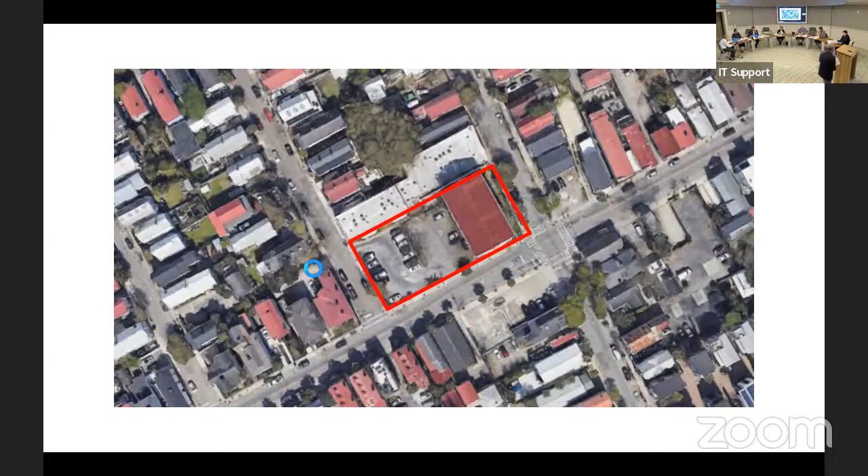Thank you. My name is Vince Graham. I live at 5 Charles Street. On behalf of my business partner, Bob Holt, who is also my neighbor, we live about 3 blocks from this project. As BD showed you the location briefly, I'll mention again, this address is a mile from the Ashley River, a mile from the Cooper River, a mile and a half from Magnolia Cemetery, and a mile and a half from White Point Garden. It's in the center of the historic peninsula. When it was a church, which it was for 100 years, St. James Methodist, the motto was 'In the heart of the city, for the hearts of the people.' And it's certainly in our heart.

I would also like to introduce my associates, my associate Ann Tyler Howell and Jalen Johnson, our structural engineer Craig Bennett, and our architect David Thompson, and his associates Lily Knox and Savannah Puckett. So with that, we're super excited. The good news is the project, we've been working through the process, and it was recently confirmed as being put on the National Register of Historic Places. So that's what's changed since the last time. But with that, I'll turn it over to Dave.

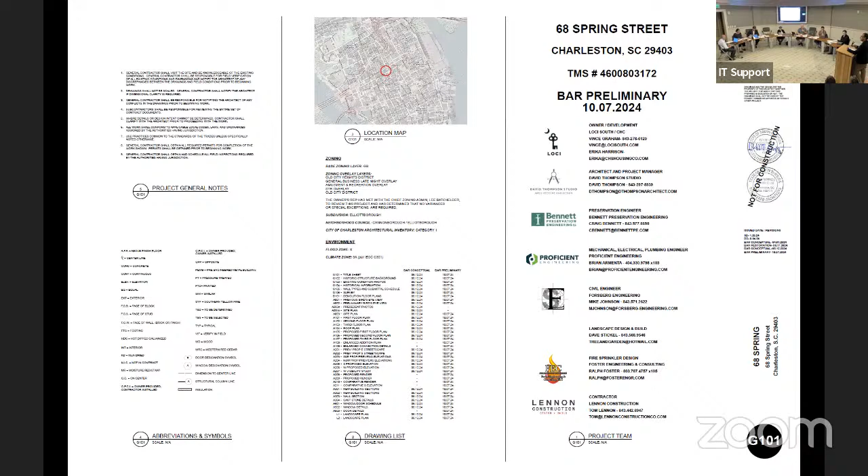As we're going through that process, our team has used the Secretary of the Interior standard for the treatment of historic properties as a guide during the design process. I'll offer a brief update for board members present tonight that were not present at the last meeting. Board comment from the April reading of the previously proposed work was to provide a more complete and detailed inventory of the scope and repair work to be performed for the historic structure. The detailed repair narrative and supporting drawings and specifications was submitted by our team in May and was reviewed and approved by staff without comment or objection.

As such, this proposal is primarily focused on the proposed addition to the west side of the existing building. On January 17th of this year, we reviewed the scope of work and proposed use for the project with Chief Building Official King Granada and Captain Rick Flugie of the Fire Department. During that meeting, it was stated that use of the existing third floor will require an accessible route and an accessible code compliant means of egress. To satisfy those requirements, an elevator must be provided, as a lift is not allowed for more than one story of travel, and a new stair must be constructed to provide a second means of egress from both the third and second floors of the existing building.

Secretary of Interior standards state that it's often necessary to make modifications to a historic building to make it compliant with accessibility code requirements. Work must be carefully planned and undertaken in a manner that results in minimal or no loss of historic exterior and interior character-defining spaces, features, or finishes. The goal should be to provide the highest level of access with the least impact to the historic building.

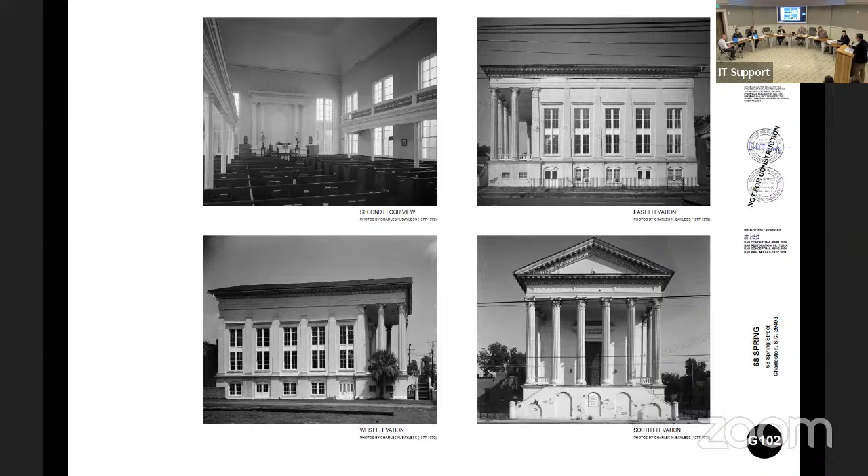I'll keep it slow with the clicker. Wait.

To address the required code compliant needs of the building, a 3-story stair and elevator addition is proposed, based on unanimous feedback from the board at the April meeting. We've reconceived the design of the addition to be a considerably smaller footprint. Just for reference again, previous in April and current now, a distinct building form, so to be a smaller footprint, a distinct building form, and be connected to the historic structure by a significant hyphen element.

To achieve the smaller footprint, all restrooms were repositioned to be inside the existing historic building rather than inside the proposed addition. This effort reduced the amount of historic fabric affected by the addition and reveals an additional bay of windows towards the public right of way on the west side.

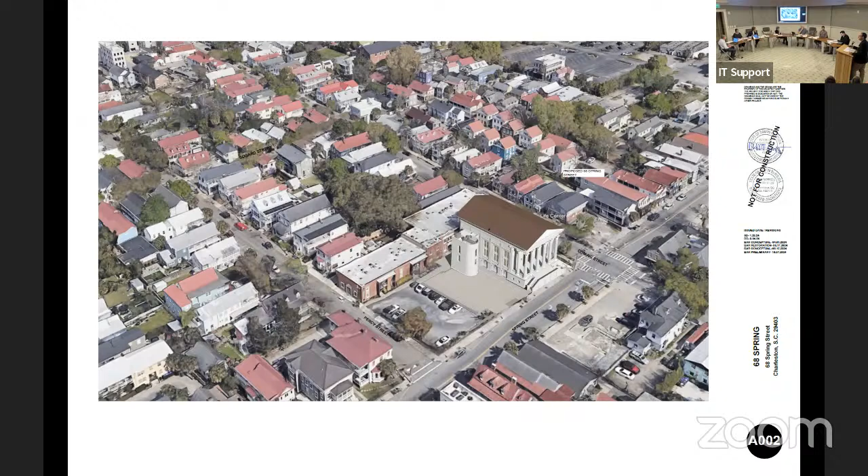We're gonna look at the plans here in a second, I promise. And if you need, Lawrence, forward sometimes. The first floor. So just to recap how we got here, and forgive me, Seton and James.

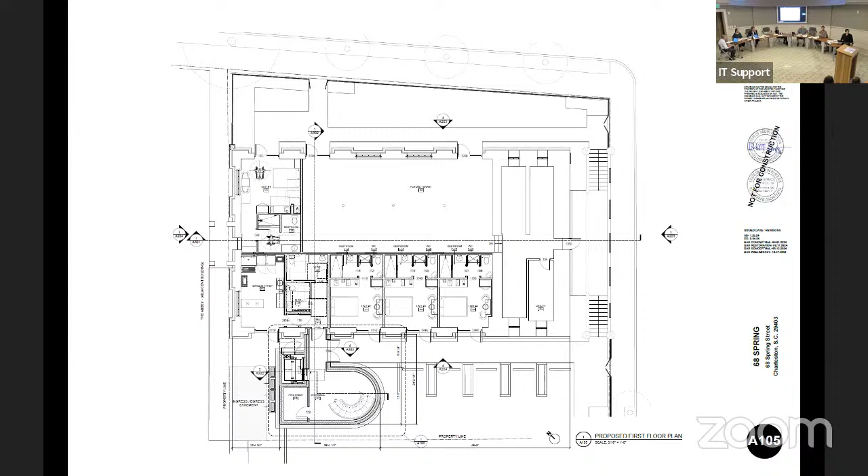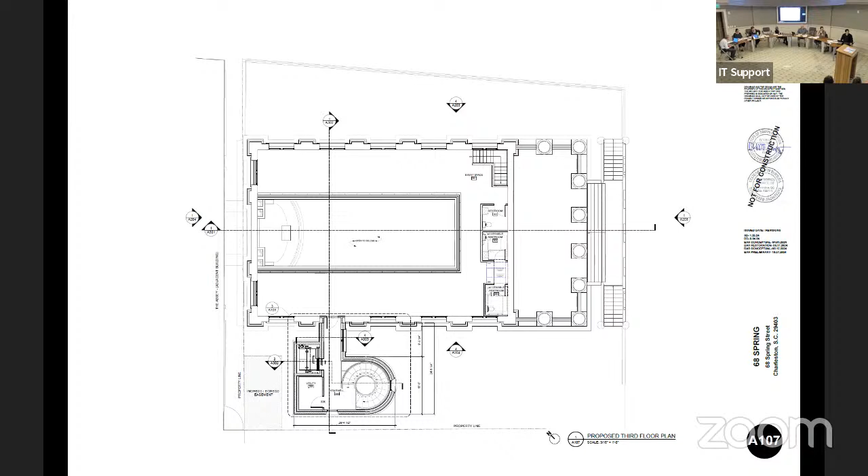So now the bathrooms have been repositioned on the first floor here; previously they were in this piece. On the second floor, this is reduced now to only having the electrical room, elevator, and stair. The remainder of the bathrooms have now been positioned on the existing third floor balcony, and we're using the existing organ facade to hide two of those.

The August board review of this project granted conceptual approval of the project, with two primary areas of concern to be addressed with this preliminary approval review.

The first area of concern was the height of the addition relative to the height of the existing building. Our team worked with the mechanical engineer to reconfigure the rooftop HVAC equipment and locate four mini split condensers at grade behind the addition, so that we could reduce the height of the stair tower parapet by 25 inches. The hyphen height has now been reduced by 32 inches. These are significant height reductions and now ensure there is no alignment of proposed new elements with historic entablature elements.

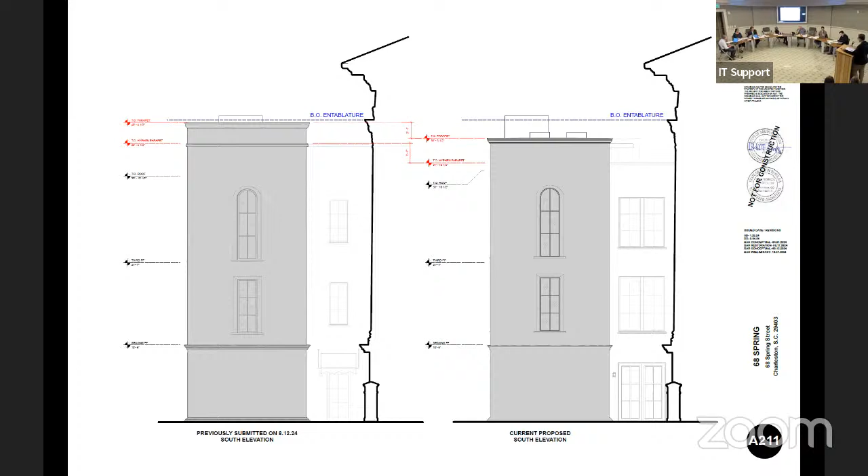To address staff comments about making the proposed addition distinct from the historic building, the frieze on the stair tower parapet has been removed, and the base, water table, and parapet detailing has been revised, further as shown on sheet A304.

The second area for further study was the architectural direction of the hyphen, to assure it is distinct from the historic architecture. A change of material or color was suggested by some board members. In my opinion, a change of color without a change of material felt architecturally arbitrary. Our team developed several alternate schemes.

First, a change of material, which would yield a change of color as well, to clad the hyphen in copper. This felt too loud rather than subservient. Second, we explored painted wood siding for the hyphen. This felt out of step with both the existing building and the stair tower in terms of scale and material value. Ultimately, our other proposals for alternate cladding of the hyphen felt discordant with the original architecture.

Ultimately, we felt the best way to distinguish the hyphen was through simplifying the details and increasing the percentage of glazing. The proposed south elevation of the hyphen is now 43% glazed elements. This amount of glazing is 2.5 times the amount from the previous submittal. The detailing of the window openings as well as the parapet is both distinct and less adorned than both the historic building and the stair tower.

The finish of the stucco on the proposed addition and hyphen is a lime wash over a hydraulic lime plaster, U.S. Heritage Group, whereas the proposed finish of the historic building is being finished with a mineral paint applied over the existing brownstone and stucco elements, which are currently painted. The finishes of the new construction will therefore be distinct in texture, sheen, and ultimately by subtle variation in color.

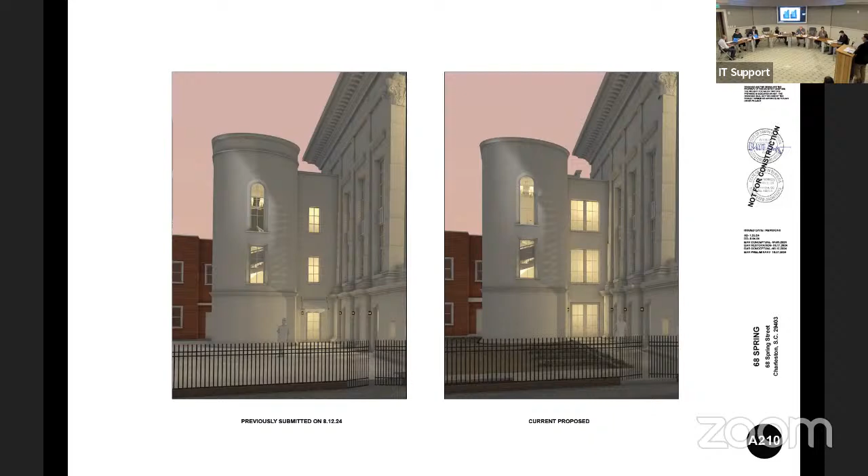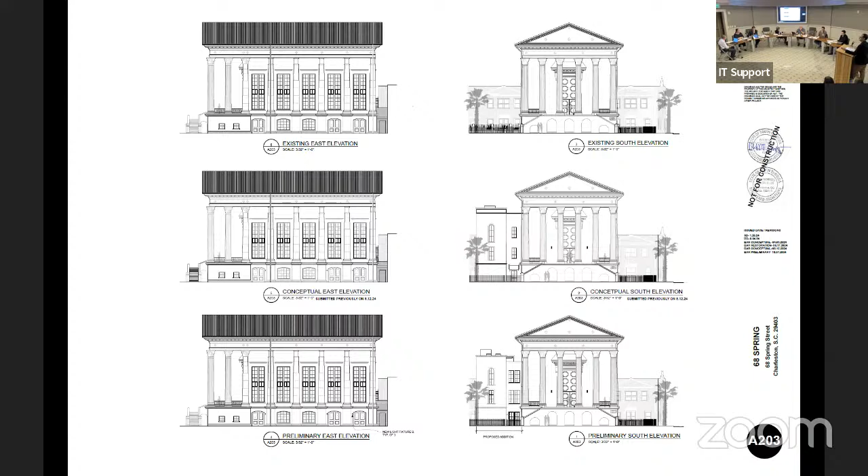A small but critical detail is the joint of how the hyphen touches the historic building. This point was raised by Jay White at the last meeting, and I took his comment quite literally as a technical question, which we've detailed with Bennett Engineering and provided on this sheet A109. The expansion joint is internally dealt with by the use of an L-shaped glide plate.

Of course, there's also an aesthetic opportunity here to develop a more poetic outward expression of the joint through architectural detailing. While small in scale and subtle, it's important, and we will develop that detail during construction documents and dialogue with city staff.

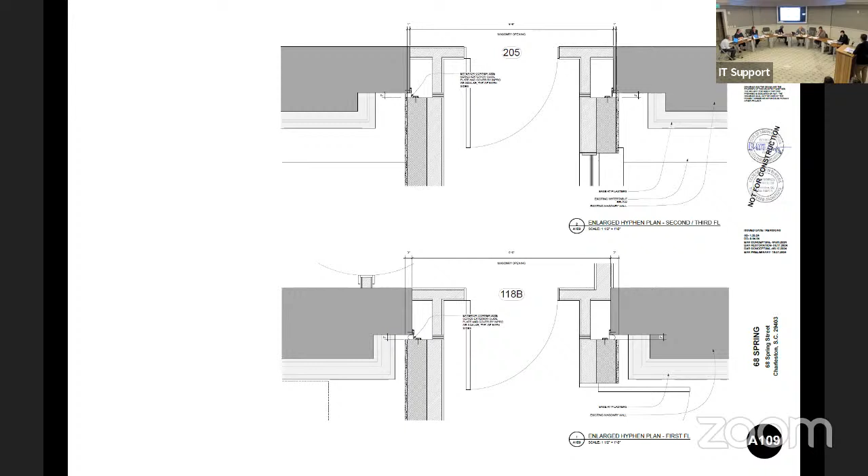We believe this proposal achieves the necessary balance between compatibility and differentiation as outlined by the Secretary of the Interior Standards. Differentiation is in the details, such as the fenestration proportions, patterns, and shapes, and the primary form of the stair tower. The building shape is wedded to the construction methods and materials in a traditional masonry and stucco method, appropriate to the form.

It includes subtle, battered openings at the primary fenestration. We're offering a design to provide minimal required life safety and egress components in a manner which is deferential and complementary to the historic icon. We're asking for your approval of the application with a motion of preliminary approval and the final details reviewed by staff. Happy to answer any of your questions. Appreciate your time. Thank you.

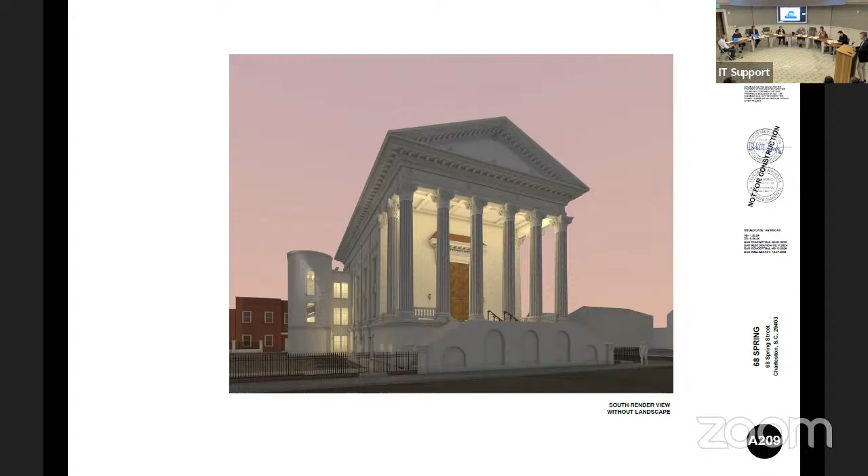Mr. Chairman, fellow board members, my name is Marion Hawkins. I'm president of the Cannonborough Elliotborough Neighborhood Association. I'd like to thank our residents, Bob Holt and Vince Graham, for their stewardship of this property, and also the architectural team for the development they've done as they've developed this design further and further. This has been presented to our neighborhood association. We have engaged them throughout the process, and we have supported this overwhelmingly and unanimously at our meetings.

On a personal note, my degree is in architecture from Clemson. I worked in the profession for several years, and I really applaud this sensitive addition and service tower to the project. As a matter of fact, my personal office has been in the basement, still lives in the basement of this building, and has been for the last 3 to 4 years.

I also want to commend that I like the fact that they are using the same stucco material and not doing such a drastic, typical modernist approach of a different material for the hyphen as well as the service tower. I feel like this blends in very well. Otherwise, it would stand out and call attention to itself, where this is set back and articulated in such a way that I feel is really a very subtle and beautiful addition. By myself and on behalf of the Neighborhood Association, we would encourage the board to approve.

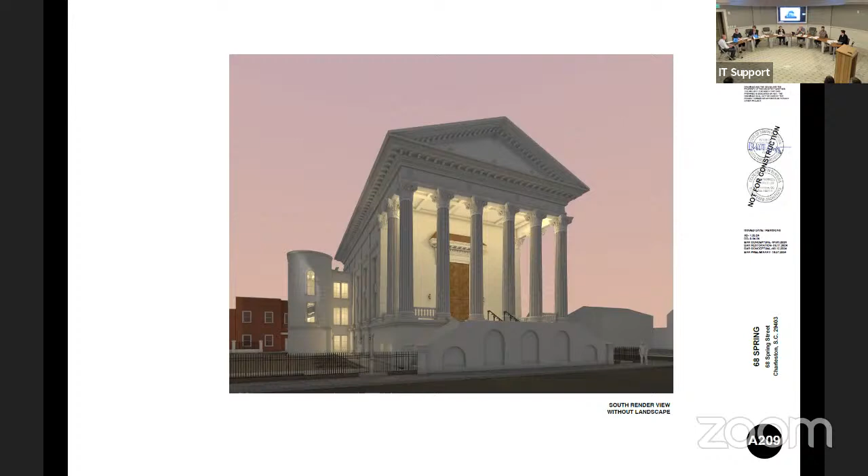Staff support the hardscape site plan as shown. I know it wasn't discussed tonight, but it's part of the submittal packet, which means it's part of the official review. The parking lot side of the site plan is under an easement, so once approved by BAR, the applicant will need to work with the property owner before making improvements.

At both previous board meetings, board and staff requested that the parapet on the circulation addition be reduced as much as possible to reveal more of a historic entablature. The applicant has significantly reduced the addition's parapet and met that condition. Staff support height, scale, and mass of the addition as shown.

At both previous board meetings, board and staff requested that the new addition should be clearly discernible from the old, per the Charleston Standards Policy Statement. At the August meeting, the board's motion was for conceptual approval with further study of parapet height and architectural articulation of the hyphen. In particular, the board asked the applicant to study the joint where the hyphen meets the historic building and to consider either a different color, a different material, or architectural expression that clarifies the distinction between the Category 1 building and the addition while still being compatible.

The board did not question the traditional approach to the architectural character, but wanted further discernment of the relationship between old and new as expressed in the hyphen in general, and articulation of the joint of the hyphen and the historic building in particular. While the submittal does show changes to the fenestration in the hyphen, the applicant has not met the board condition related to the restudy of the hyphen. Staff conditions for approval: restudy of hyphen connecting circulation tower to historic structure per board conditions at conceptual review, and staff recommendation is deferral for restudy of articulation of hyphen per board conceptual review motion.

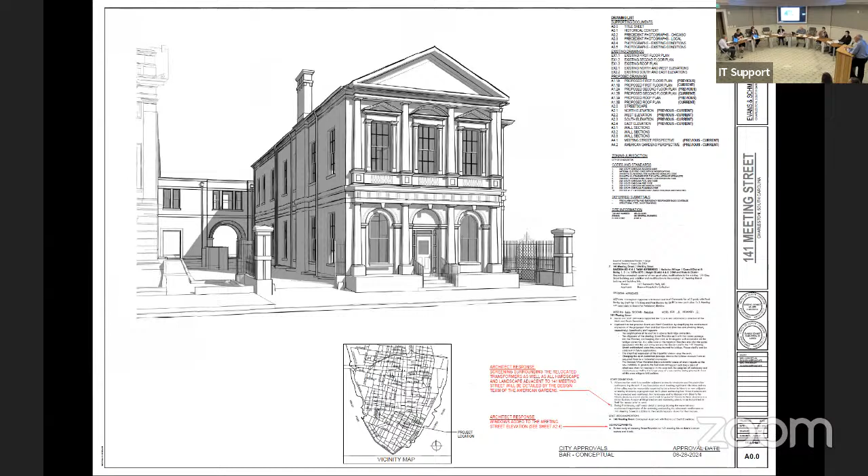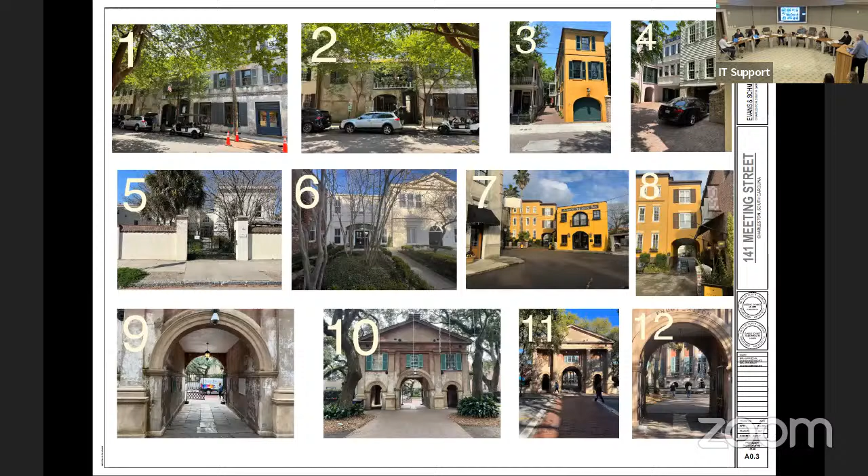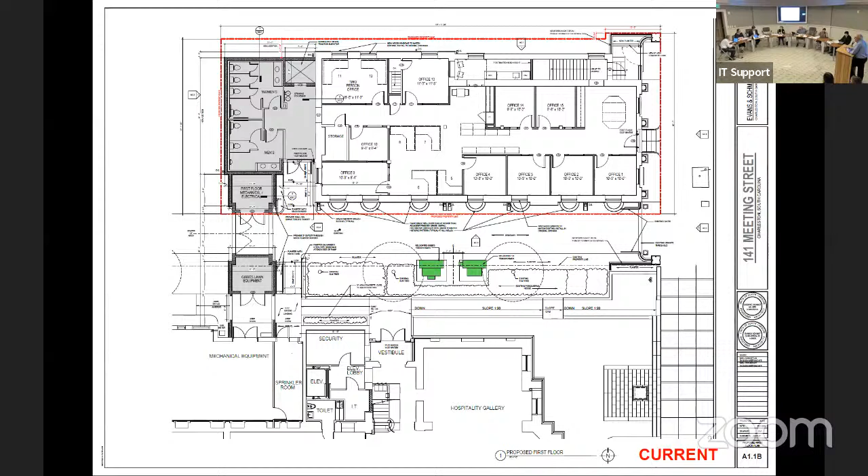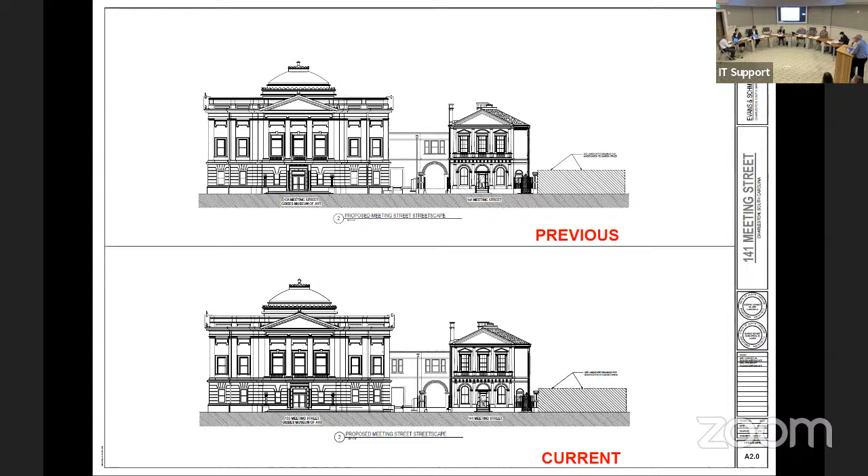So you can see the previous and current here, we've added that extra pair of windows there on the second level of the link between the two buildings. Yeah, that's the only change that we restudied, or felt needed to be restudied, or were asked to restudy, as we progressed.

Yep, all right, no, that's, sorry. We appreciate that, brief. Yep. Thank you. All right, any questions from the board?

One question. So the only change is that you added windows, where you added windows, correct? Which is funny, because last time, when I was leaving, you said one thing that museums don't like is windows. So just wanted to make a comment. Thank you. That we did what was requested, and I'm working very hard to convince Angela that it would be a good connection to pull people from one building to the other with that natural light, so working that. Thank you. Thank you.

Thank you so much. Is there any public comment?

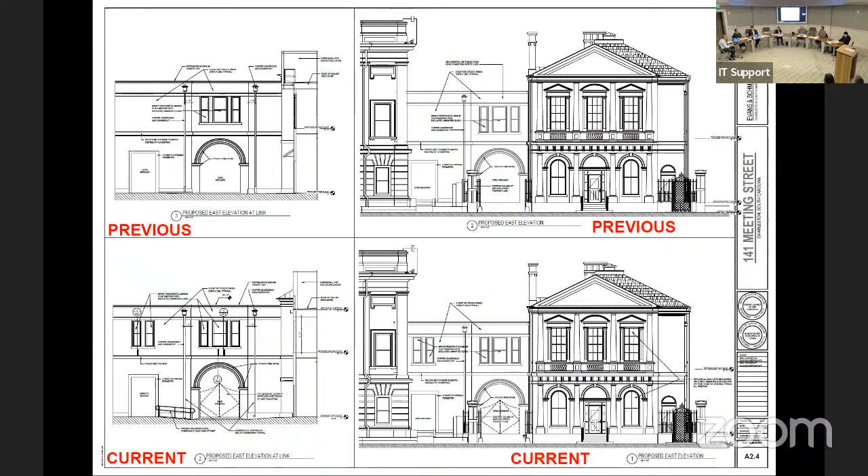All right, okay. The board and staff previously supported height, scale, and mass, and architectural direction of the north and south elevations during the June meeting. In addition, at the August meeting, board and staff supported the general direction of the bridge between the E.B. White Building and the Gibbs Museum, with the condition of restudy of the Meeting Street elevation so that it is not so austere and blank from the view of the public right-of-way. The applicant has added fenestration to the Meeting Street elevation of the bridge and has met the restudy conditions.

During the June BAR meeting, staff supported the moving of the transformers for the benefit of the project. Staff noted, quote, at the preliminary stage, staff require further study of the specific material and design of the proposed screening for the transformers. No such study appears on the drawing set. Staff require that this applicant or the site design team provide such design documentation during final review as a requirement for approval of final review. There needs to be better coordination and communication among the design teams on this matter. Without such documentation being provided, a final review application will be considered incomplete and therefore will not be reviewed.

Staff conditions for approval: number one, which this applicant has seen many times, is do not disturb our precious Category 1 building during construction. Staff condition number two, clarity on which design team will be providing the information related to the screening of the transformers as part of their final review submittal package. Staff recommendation is preliminary approval with board and staff conditions and final review by staff.

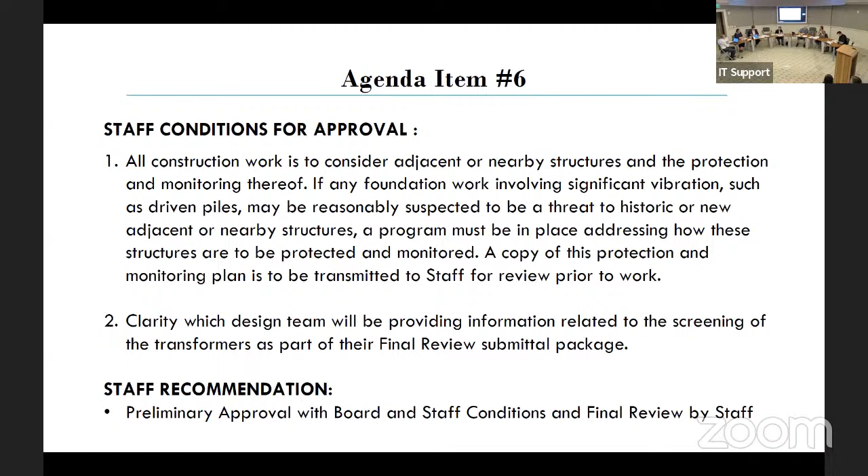Thank you, I bid you adieu. I have to go to an award ceremony with my daughter. Otherwise, I would not want to miss a discussion of garage doors. Thank you for sending that follow-up. Absolutely, that's why I wanted to do that before, since I was going to have to get out.

All right, you're in the capable hands of the staff architect. Well, thank you all for being here on this. I know it's an important issue for y'all. For this one, we're going to do some background information, then we're going to have some public comment, and then we'll have the staff and board discussion. So with that, I will turn it over to you all.

Thank you, Mr. Chair. Let the record reflect that Dr. Gordon Galvin has left and has been replaced by staff architect Lawrence Courtney. First, this is a staff request for continued board direction on Corinne Street HOA PUD garage doors. For background: 3 Corinne Street, Unit A is part of a 36-unit development under the Corinne HOA, which was approved by the Board of Architectural Review, BAR, on March 10th, 2004.

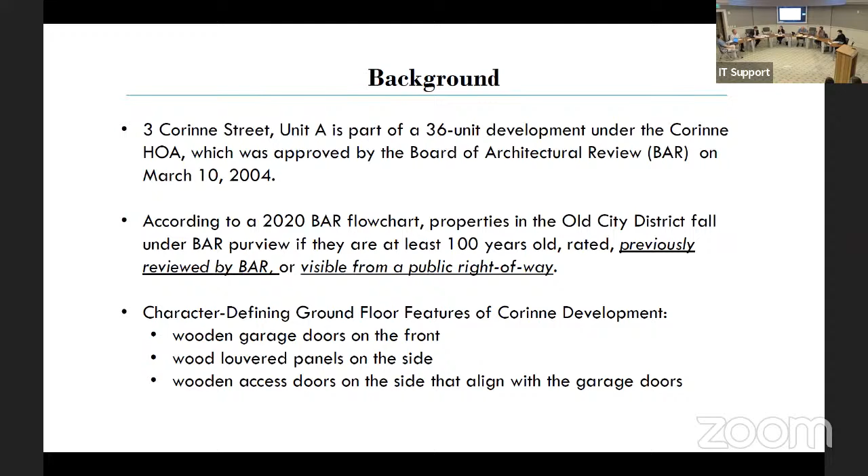Some character-defining ground floor features of the development include wooden garage doors on the front, which are perhaps the most prominent, significant, and visible. There are wood louvered panels on the side and wooden access doors on the side that align with the garage doors. Additionally, there are steps up to entryways, and there are balconies as well.

Further background: a garage door was installed at 3 Corinne Street, Unit A, without BAR approval. The after-the-fact garage door does not match the original design approved by the BAR in 2004. Other residents of the HOA have also replaced garage doors without the appropriate permits or BAR review.

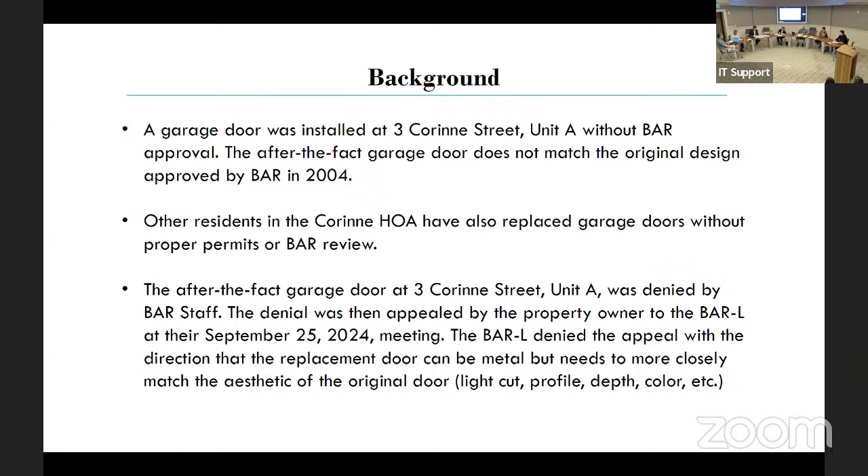The after-the-fact garage door replacement at 3 Corinne Street, Unit A, was denied by BAR staff. This denial was then appealed by the property owners to the BAR at their September 25th, 2024, last month's meeting. The board denied that appeal, with the direction that the replacement door can be metal but needs to more closely match the aesthetic of the original door: light pattern, profiles, depth, color, etc.

This slide shows what was originally there and what has replaced it on Unit 3A. There are other doors that have been replaced or are actually missing in this development. So staff is seeking direction on how the board wants to proceed in terms of handling this overall replacement over time with individual garage doors. For now, we'd like to hear from the public.

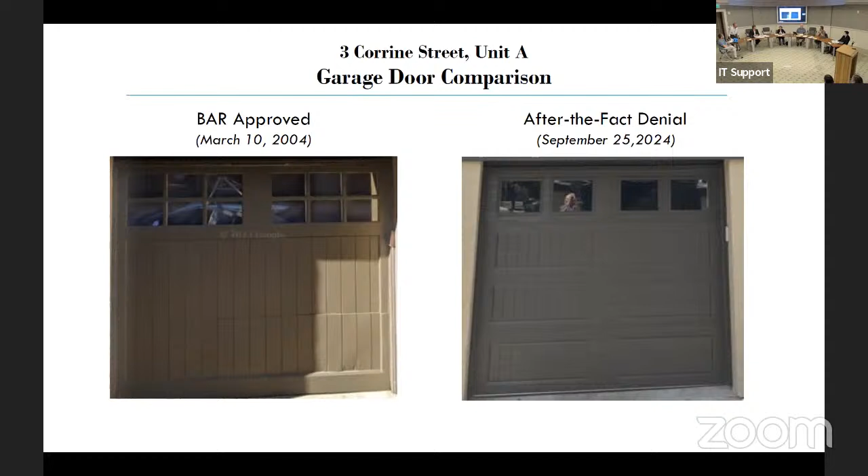I am Lawrence Courtney, staff architect with the Department of Planning, City of Charleston. And as we just heard, we have a little bit of a mess here, and that's why staff is before you this evening seeking direction.

We have done some research in the months since we last met, and found out that there really aren't a whole lot of opportunities for replacement if the goal is to reproduce what's there now, which was approved by the BAR in 2004.

That being said, our goal is to help out these good folks by finding a solution that will lend uniformity to this PUD, which is in agreement with the PUD documents, and yet gives them a little bit of flexibility to explore options and come back to staff with their options, letting staff work with them either independently or, better, have their HOA work with staff to identify appropriate solutions.

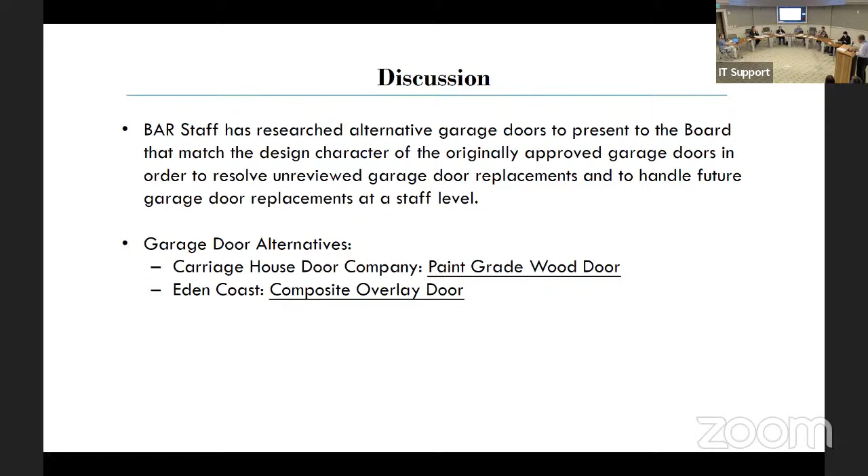Furthermore, let me say we're not advocating only these doors. We're interested in entertaining any door manufacturer. It's really the character, look, and feel of the door that matters. So I'd like to show you some doors, and hopefully we can all come to a common mind that this is really the look we're after, regardless of manufacturer.

Then we'll proceed from there. This shows one of the classic doors made by Carriage House, the Carriage House Door Company. Of the ones we've looked at, this door most appropriately represents the door that is there now.

May I ask a question? Is it sectional, though? It has four panels, I think, right? So that's it, it is sectional. Yes, upward acting sectional doors. I think all of the doors you'll see, if they can be made as just tilt-up doors, but they're also available as upward acting sectional doors - a very different mechanism.

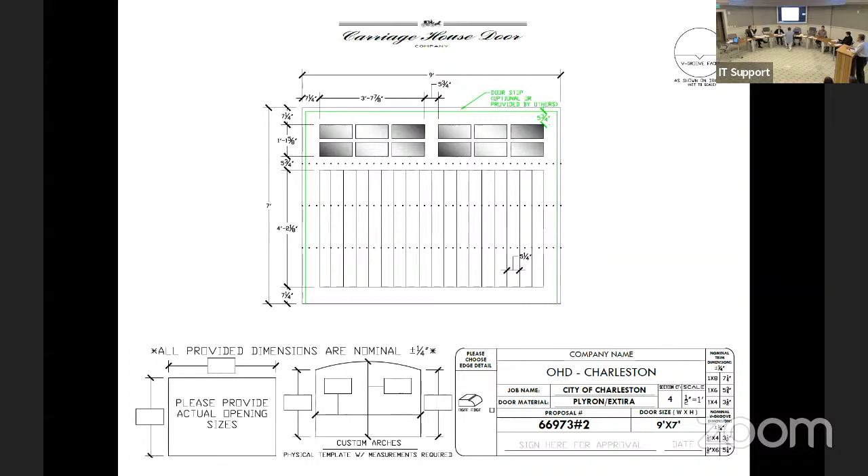I just want to read it. We hadn't seen the proposal till now, so we should be able to comment on that. Okay, at this stage this is just a board discussion, and it's not even on a particular application. We've been asked by staff to consider this to help give them additional direction.

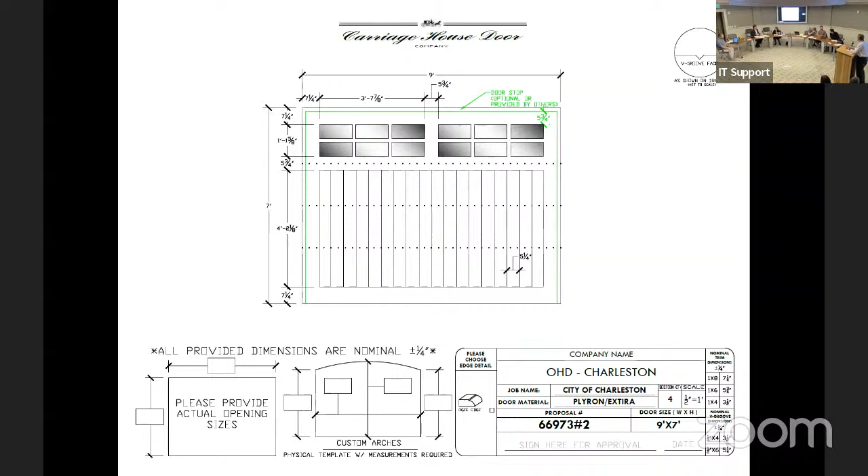Are we treating this differently than any other homeowner? Say a homeowner across the street wants to come in and use the same door - are we assigning this just to planned unit development, or is it something else? Do you have that up? It's in my mind specific to this PUD.

So then I have a problem with it, because this should apply to, as I put in my note to BD today, even if another house is in an HOA. From a city perspective, notwithstanding the HOA, it should have the same guidelines. But I think I maybe understand what you're saying - it's applicable to another HOA, you just pick one from these companies that's appropriate for that HOA. Is that what you're saying? Because I don't know how we could use this just for one HOA.

This would not be something we'd use over at the development on the east side. Correct, it would just be specific to this PUD. Which is funny, I get completely what you're saying now. I was under the impression this was for anybody who came in anywhere with windows.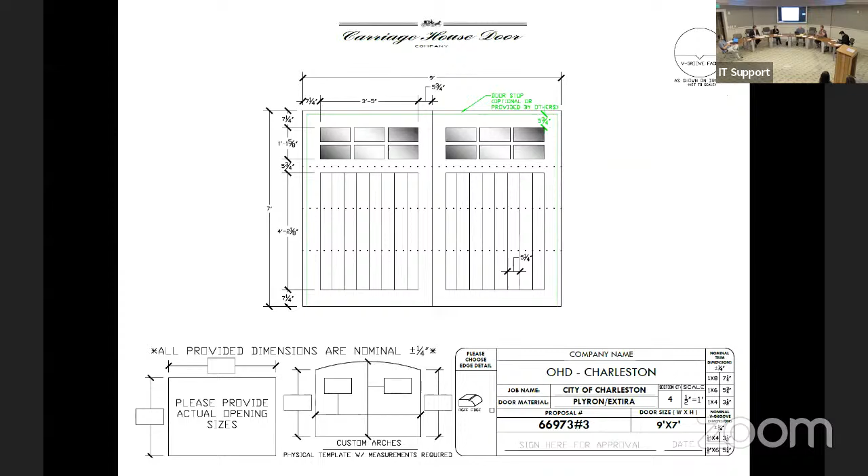There was a comment at the last board meeting about materiality and understanding the plight of water intrusion in the city. Metal or aluminum is just inappropriate for those buildings. Wood, or something that looks enough like wood, fits in better. Mr. Brown has the floor. That wood or wood composite is most appropriate for the context of the neighborhood.

Thank you, Chairman. At this time, unless there's any further discussion, I'd like to take a motion. I will be happy to make a motion. I would make a motion to provide staff approval for the submitted doors or their equivalents to process applications associated with this particular PUD.

Mr. Chairman, I would ask you to include, if you're willing, one or two sentences that this was previously approved by the BAR in 2004, and we're modifying that approval, just to tie these two things together. I believe it is part of the record, included as part of their presentation. I think Lawrence addressed that at the beginning as well, but I'm happy to include that.